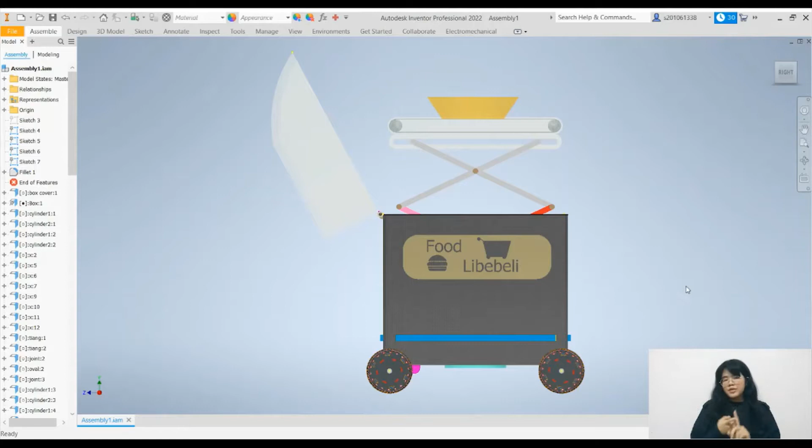Today, our group will be presenting our mini project titled Food Libebeli. I'm Alicia Nicole Bootwill, and I will talk about my roles in the group and introducing the project. At the same time, I'll talk about the objectives of our project and the key features of our project design.

To start off, my role in the group is to manage the appearance of the robot and its major functions. I'm also in charge of writing the project report for our group.

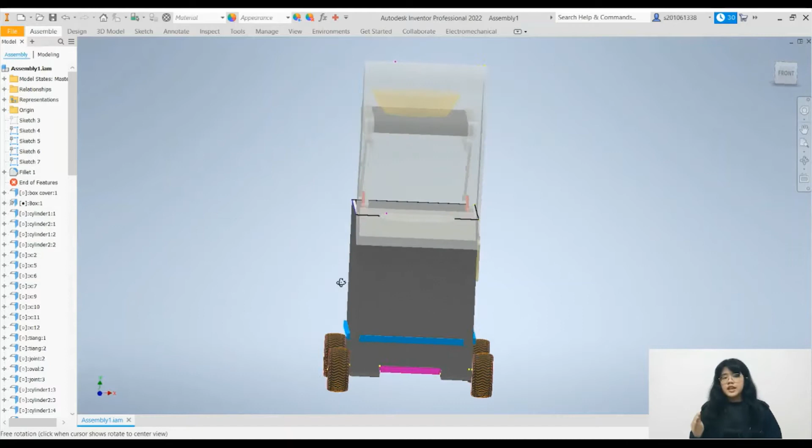With the theme of fighting against COVID-19, our group has decided to focus on the health sector and design a robot that can deliver food to COVID-19 patients and at the same time sanitize the healthcare area. Please note that this project of ours is focused on being utilized in the hospital, and we came up with 4 main objectives.

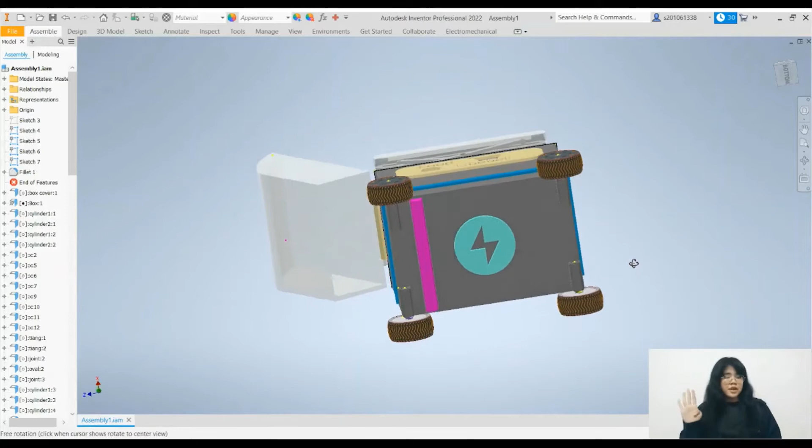Number 1, to sanitize the healthcare area. Number 2, to deliver food to COVID-19 patients. Number 3, to lessen the burden of healthcare workers. And number 4, to eliminate the problem of lacking manpower in the hospital.

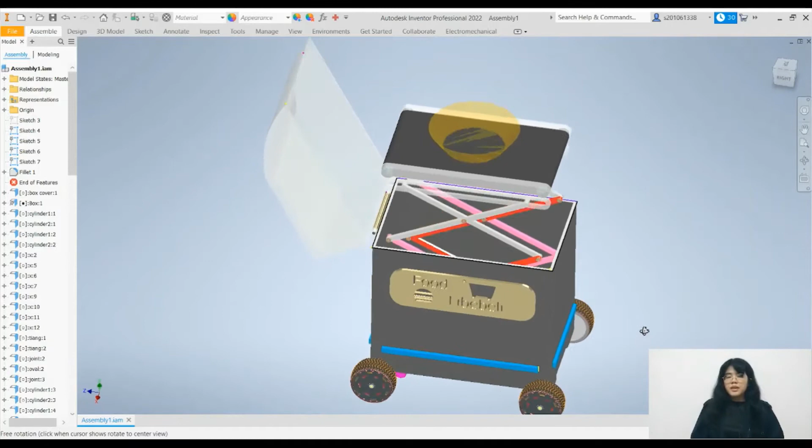Now I'll be talking about the features of the robot. The robot itself has a mobile robot coordination system with a PCB and microcontroller embedded in the base. Therefore, it is capable of transporting the food to the patient on its own, thus reducing the contact between the patient and the healthcare workers.

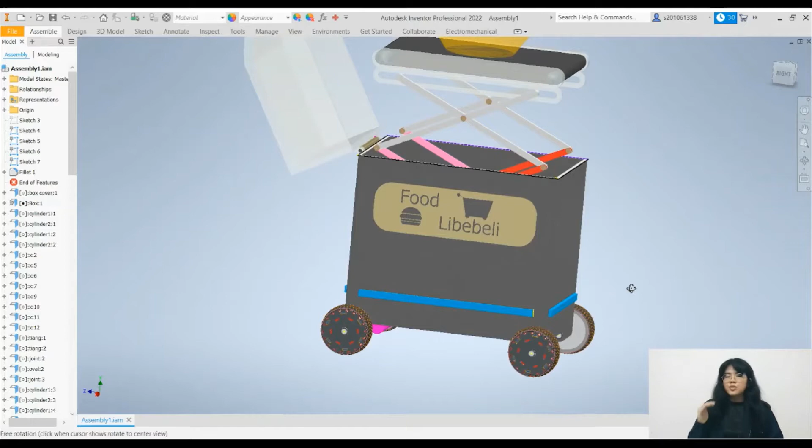Besides, the robot itself has wireless charging features located at the bottom of the robot, making it convenient for the healthcare workers to manage or maintain it.

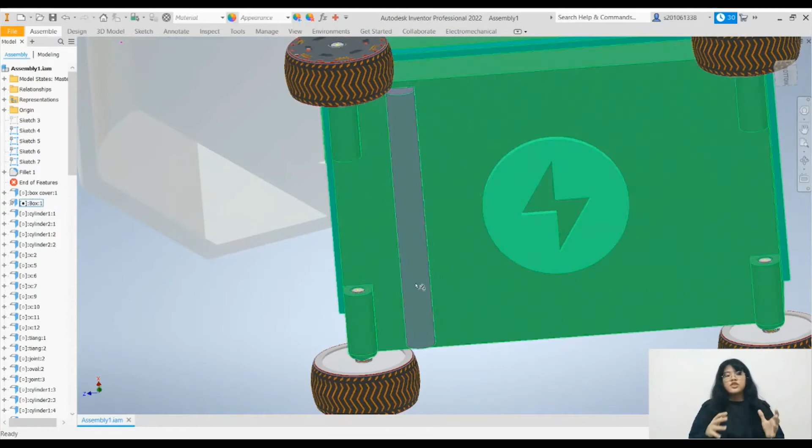To add on, the robot has a transparent cover on the top, and besides, the robot also has a UV light installed at the bottom of the robot just for disinfection purposes, as UV light is very suited for disinfection purposes. Last but not least, the robot also has built-in ultrasonic sensors around the box...

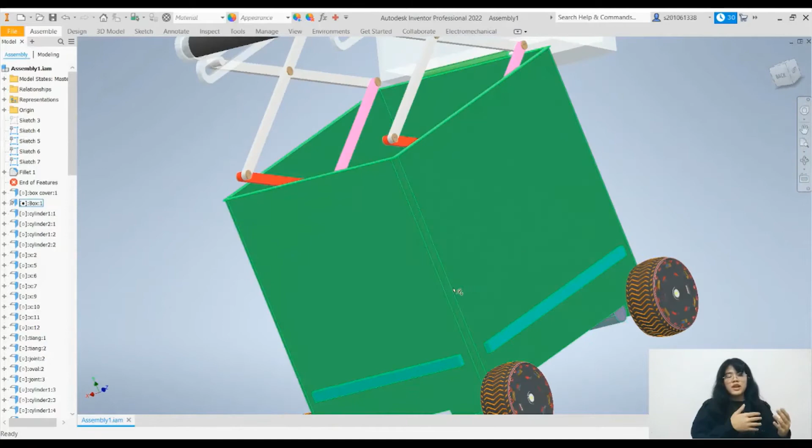...so that when the robot moves around, it can prevent colliding with other objects. It's really interesting to note that this product can be used outside of the COVID-19 pandemic, and it can be used in other various fields.

Our group really hopes that this product will help increase the overall hospital efficiency in fighting against the COVID-19 pandemic. And with that, I will pass the baton to other group mates. Thank you very much, good day sir.

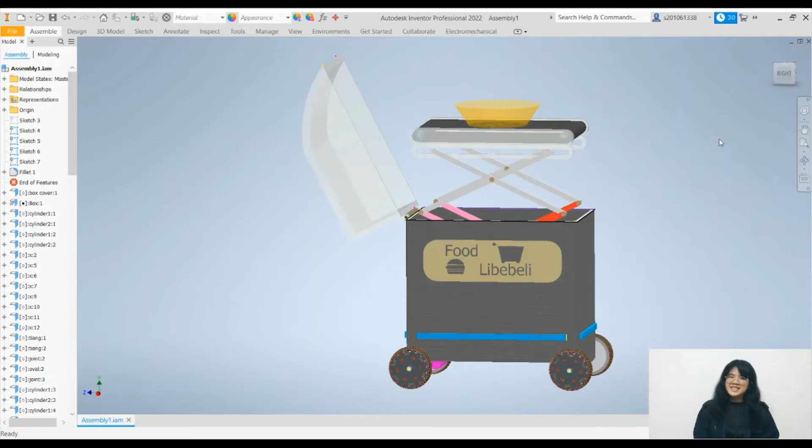My name is Hu Jun Singh, and this is our project, Libebeli Food Delivery Car. So, okay, let us see through the car inside.

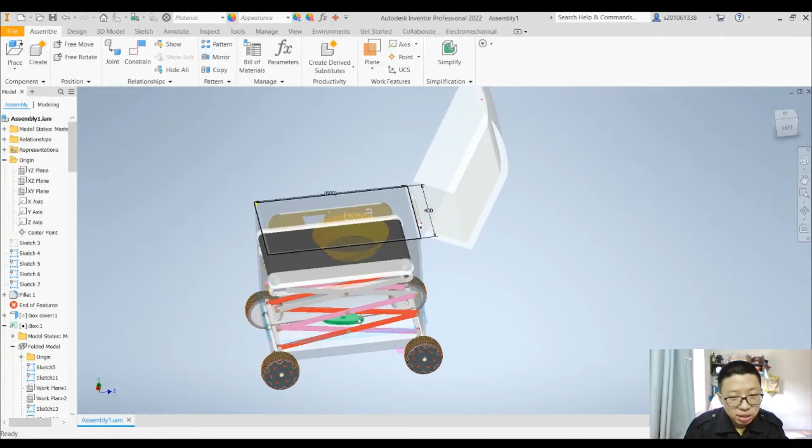As you can see, there is a lot of X joint. This X joint is used to increase the level of the conveyor belt so it can reach the patient table with the same height, so it's easy to deliver the food to the patient that is having problem taking their food.

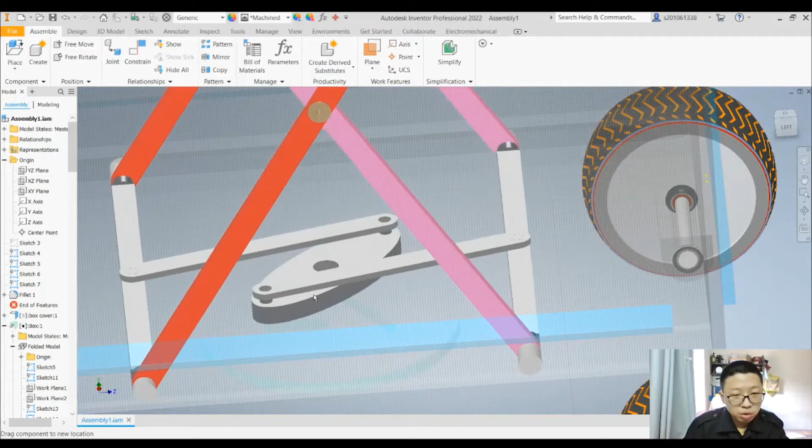As you can see, here the ellipse shape is used to control the height of the X joint so that it will not collapse while the X joint is moving upward. And also this cylindrical metal is used to prevent the X joint from collapsing.

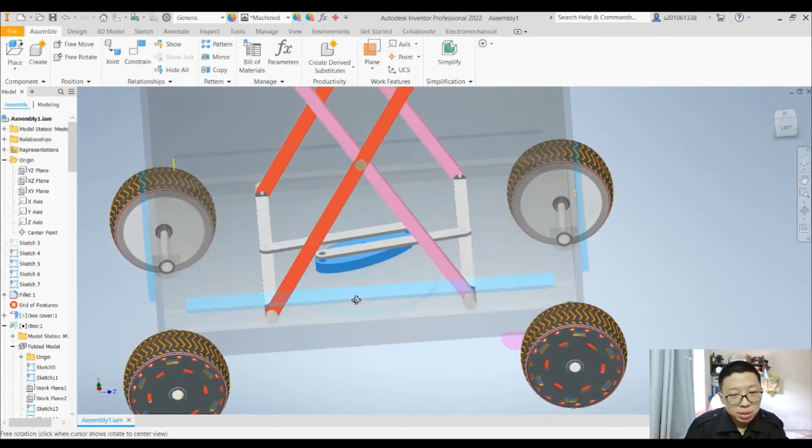And as you can see, the base is a bit thick. This is because inside there is a space so that we can put our PCB, our motor and wire inside the space, so the inside of the box will look a bit more clean.

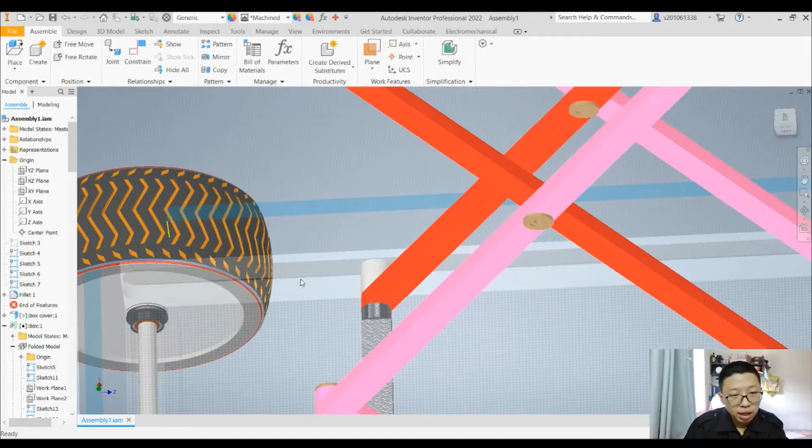And inside the box we have a bracket. This bracket is used to enable the slider to move and limit the slider from going the wrong way. Then I will pass to Wen Shen. Thank you.

Okay, good day doctor. I'm Ong Wen Shen, and I will explain this conveyor belt, what is its function and how it works. So this conveyor belt is installed above the jack support using a slider.

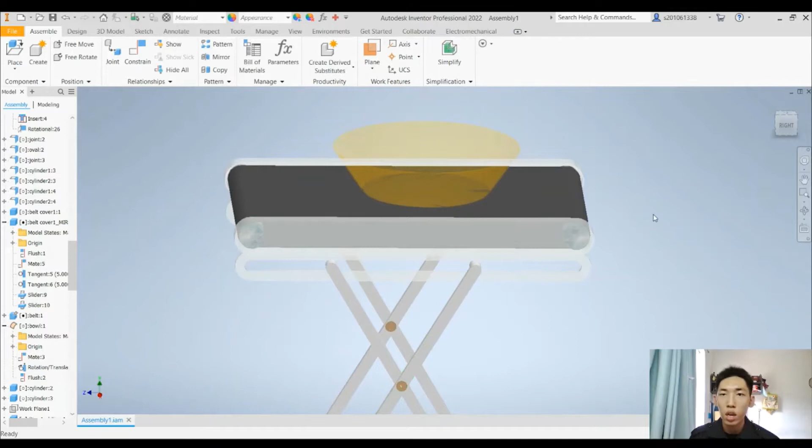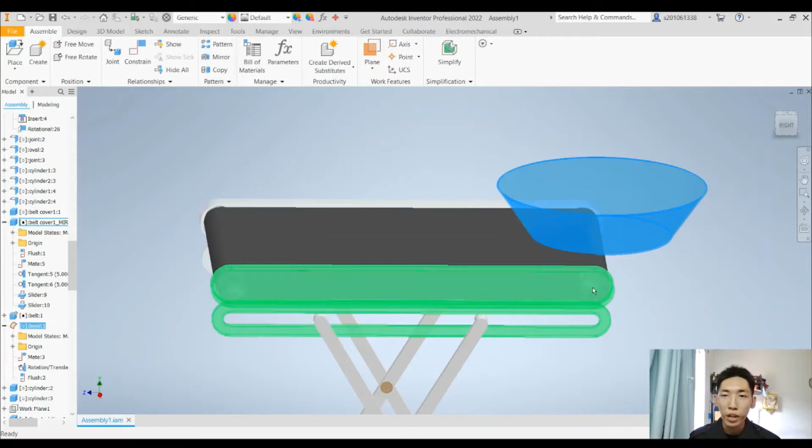This conveyor belt is used to deliver the food to the patient table when the conveyor belt reaches the table level of the patient. We can see there are two cylinders inside the conveyor belt, connected to a motor that provides motion power. The cylinder connected to the motor converts rotational motion to translational motion using the rubber belt, and the food on top of the conveyor belt will move to the patient table.

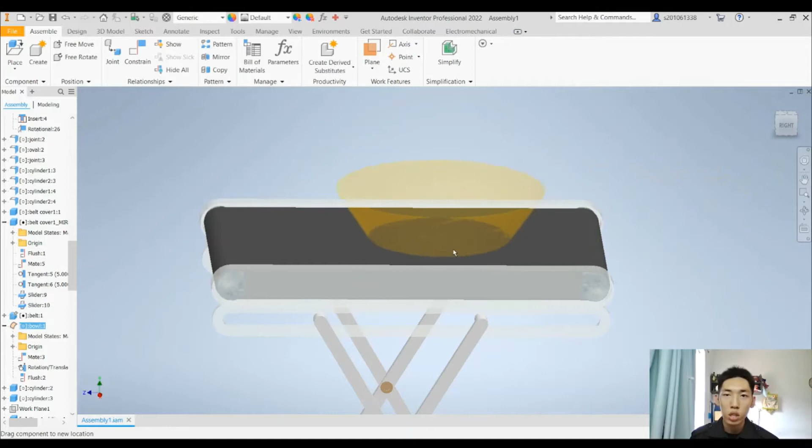This design is used to prevent the spread of virus when food needs to be delivered to a quarantined patient, and this design makes the process entirely self-service by only using this robot.

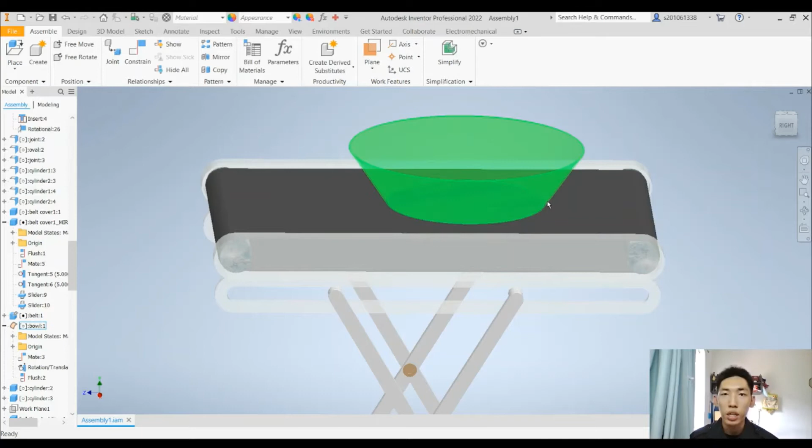Now I will explain how it works. This cylinder uses a rotational joint, and both cylinders are constrained rotationally. The bowl is also constrained to the cylinder using a rotational to translational constraint, and the bowl is also constrained to the belt surface itself so that it remains in the same z-axis position.

That's all for the conveyor belt section. I will pass to Wilson Dong Lun Shen.

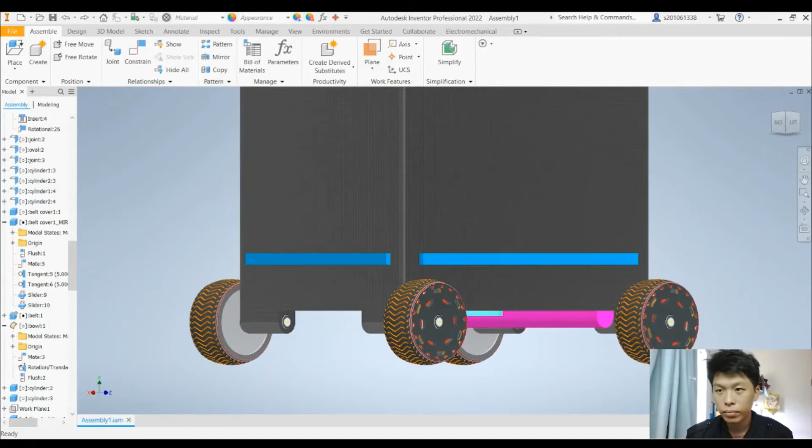I am Dong Lun Shen, one of the members of this mini project group. I'm in charge of creating the wheel, rim, and axle part. First of all, let's look at the wheel.

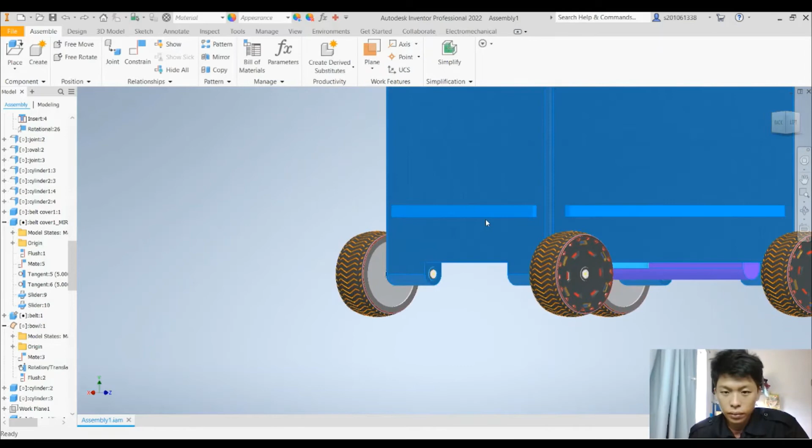The material of the wheel is polyamide, which has better temperature resistance, better puncture resistance, and stronger impact strength. Besides that, we do not use the traditional rim plus tire wheel. Instead, we produce an integrated wheel, which shortens the time for mass producing and also saves material. As you can see, tread on the tire is also formed during the production.

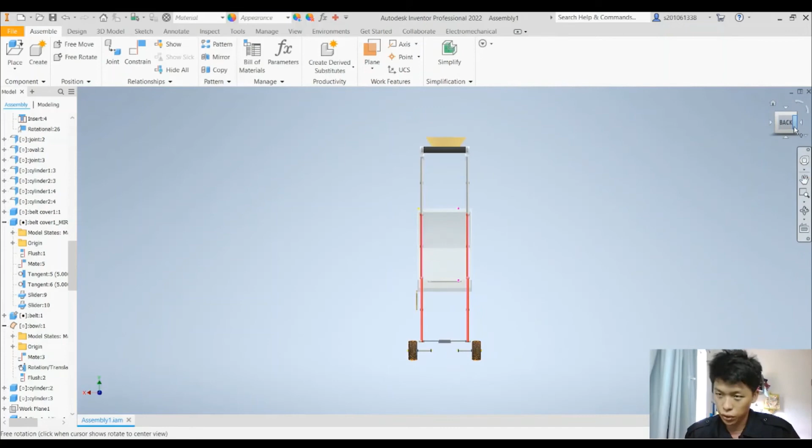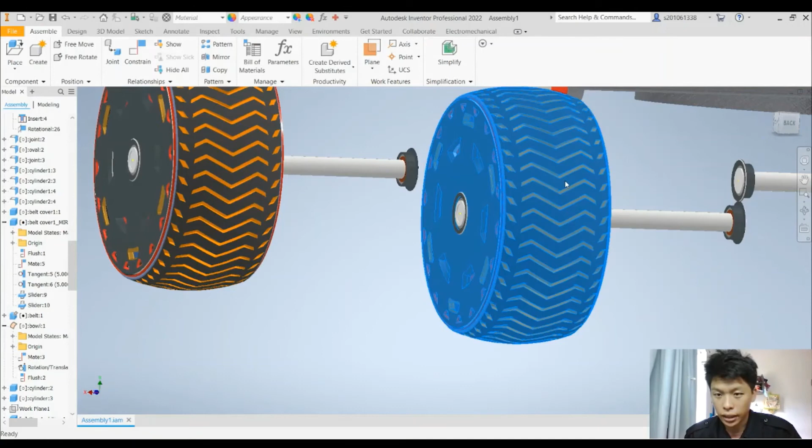In Inventor assembly mode, we constrain two bearings into the wheel, as you can see in this part. Two bearings are constrained into the wheel, or in industry, this is known as the press fit method.

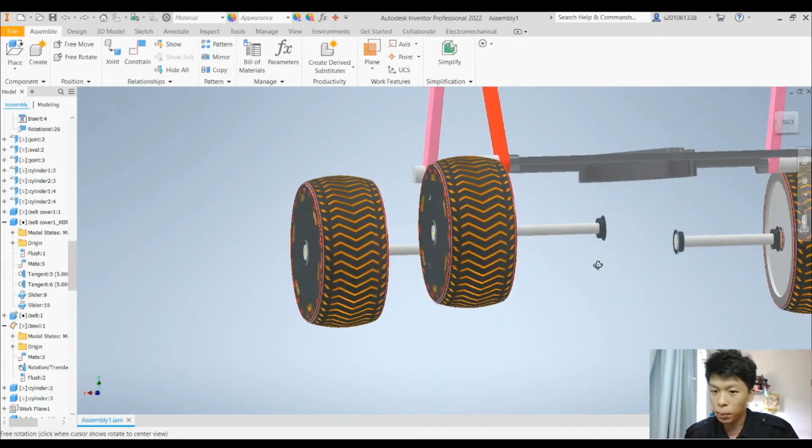The same thing - we press fit the two bearings into the body of the machine. As you can see, the diameter of the inner bearing is the same as the axle diameter.

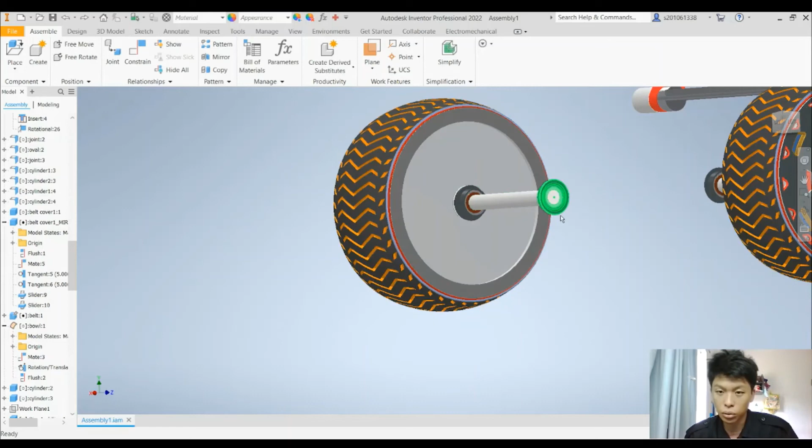Hence, we use the rotational method, which is one of the joint methods, to join the wheel, bearing, and axle together. Finally, we use a screw to constrain the axle in place so that the wheel can run smoothly.

So for the practical situation, four wheels were individually controlled by each motor, which means that to control the delivery machine to turn left or right, we control the rotational speed of each wheel. As you can see here, when I rotate one of the wheels at the front, the other wheel is stopped.

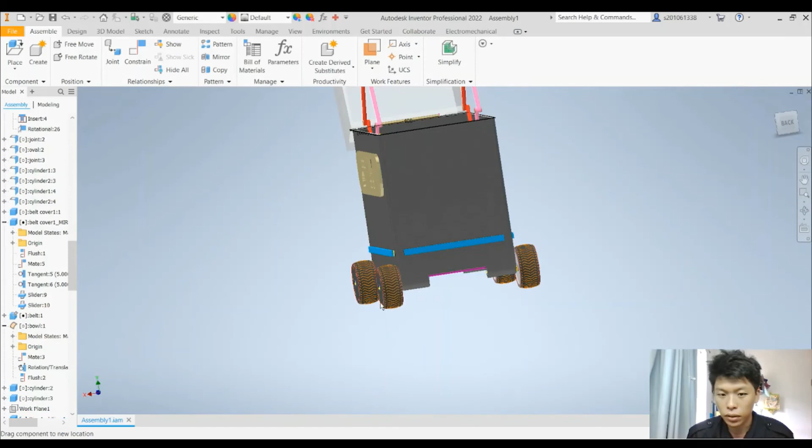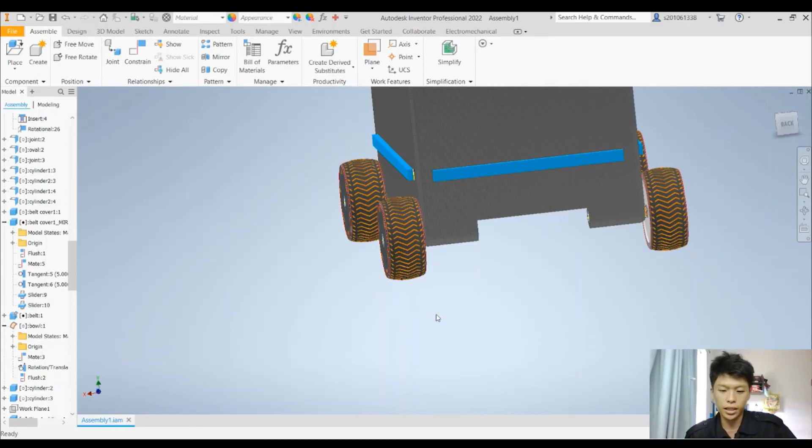So just now I mentioned that four wheels were individually controlled by each motor, which means we need to control the rotational speed of each wheel. So a programming code is written for the delivery machine.

So in conclusion, I truly believe that this machine will help reduce manpower and reduce contact between patient and nurse or doctor. The main concern for the development of this machine is to fight COVID-19 because of the sudden outbreak of the COVID pandemic again since 2020. The medical resources are draining and almost depleted in our country. By this, the existence of this delivery machine will greatly support the medical system, and more manpower will be added to the front line for fighting COVID-19 in Malaysia or globally.